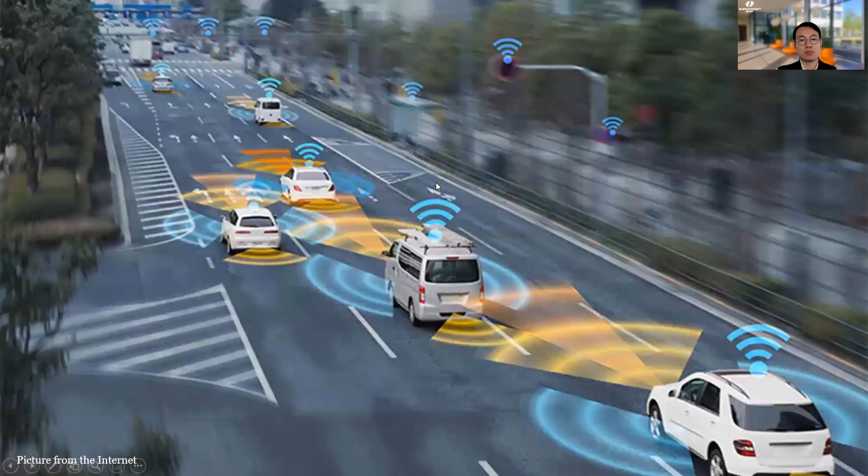So when you think of autonomous vehicles, what kind of pictures appear in your mind? Something like this maybe? Vehicles that travel harmoniously on the road with sensors to detect their distance among each other and Wi-Fi signals to receive requests from customers. But it may seem too good to be true, right? The fact is, ever since the first autonomous driving car was tested on road, there have been accidents involving this kind of system all the time.

So what happened? What makes them so difficult to realize, and what makes it so difficult to guarantee the safety of this kind of system?

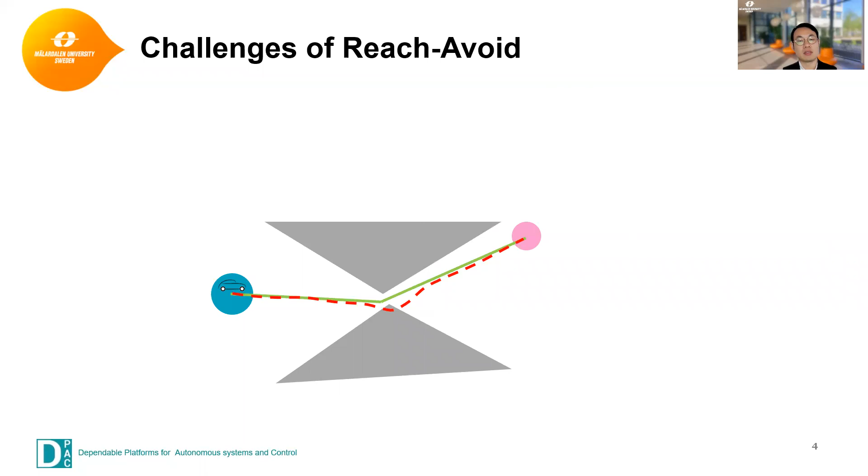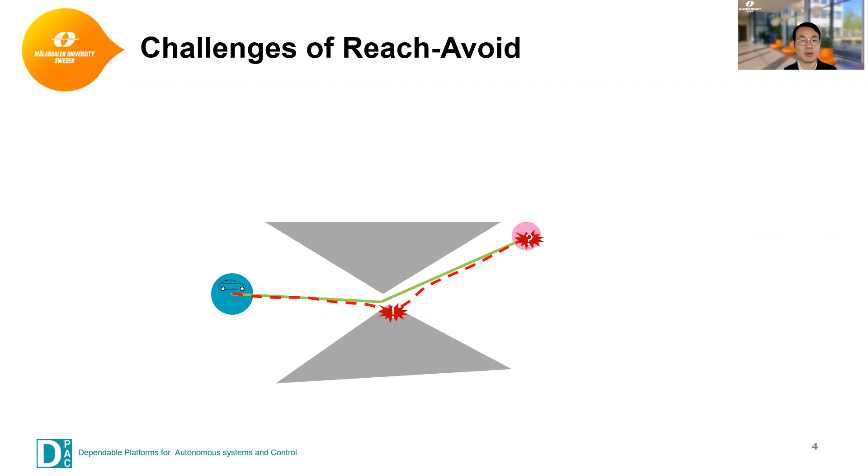But the fact is, the real trajectory has some inevitable deviation from the reference path, and this deviation can cause collision on the way, and it can make the reachability of the final destination a question mark. So the inevitable deviation from the real trajectory to the planned trajectory, which we call the reference trajectory, is called tracking error. This is the first challenge.

And even if the tracking errors do not cause a collision, there are some possibly moving or dynamic obstacles that travel towards the autonomous vehicle, and the overlap of their trajectories may also end up in a collision. So you see there are two kinds of hazards in this problem.

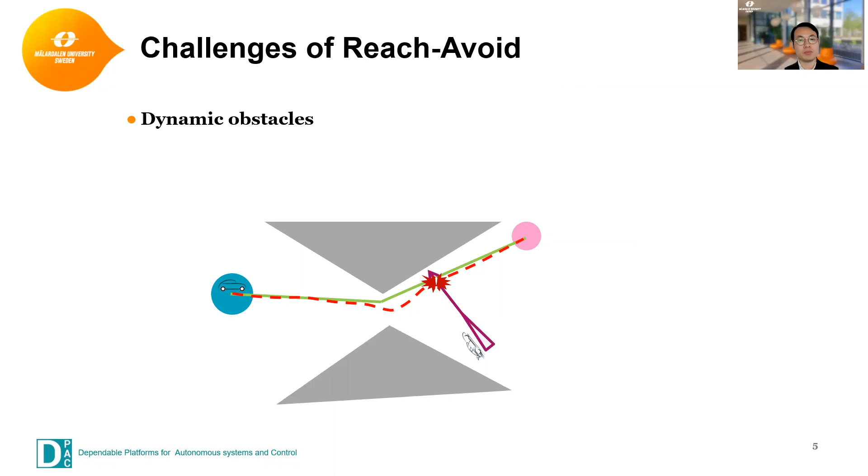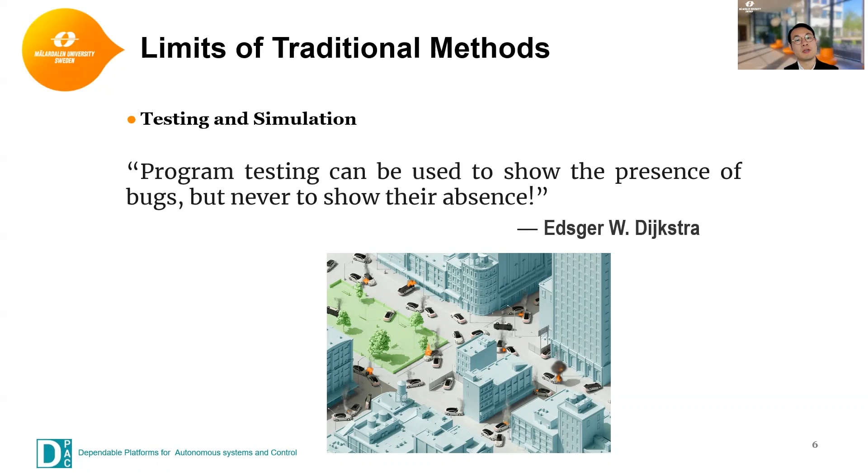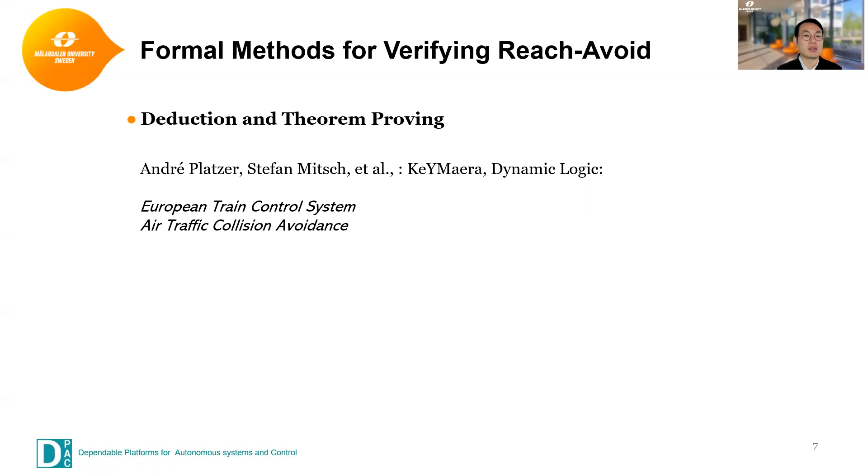But in this paper, we will be focusing on another branch of formal methods called model checking. Different from theorem proving, model checking traverses the states of the model to see if the states can satisfy some propositions or temporal logic properties. And one typical model of this technique is hybrid automata.

And to verify if the model can satisfy the reach-avoid requirement, we just need to have a look at the values of the positions, right? But unfortunately, model checking these hybrid models is undecidable. This is shown by many previous works.

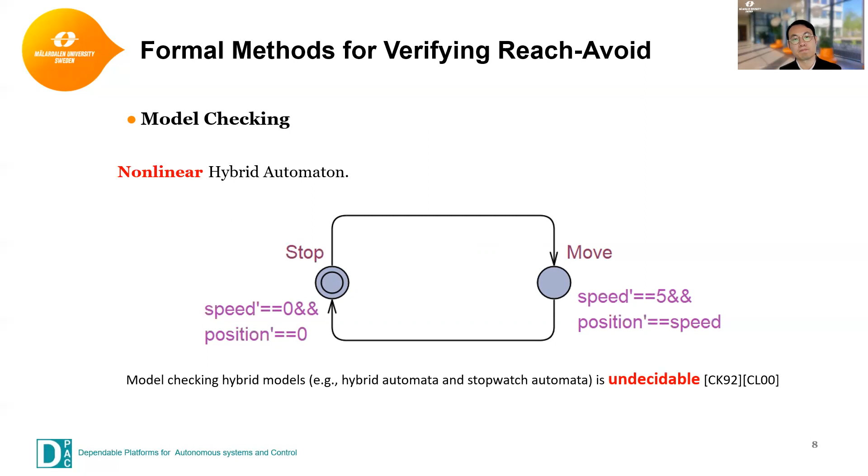So what do we do? We know that in the world of model checking, verifying hybrid models like hybrid automata is undecidable, right? But still, we have some problems that are decidable. So we want to kind of transfer the undecidable problem to a decidable one, so we can solve the problem.

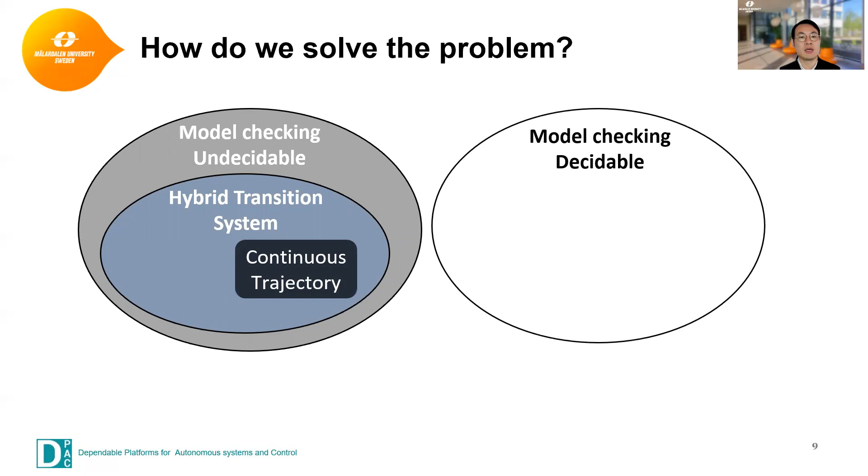Now, the good thing about using hybrid models is that, like I said before, we can get the continuous trajectory of the system, which is the real trajectory, right? So if somehow we can transfer the continuous trajectory to a discrete time trajectory, whose verification is decidable, then the problem can be solved. And of course, we also need to prove that the reach and avoid requirement of the continuous trajectory is preserved by the discrete time trajectory. So next, I'm going to show you how we make the transformation and how we do the proof.

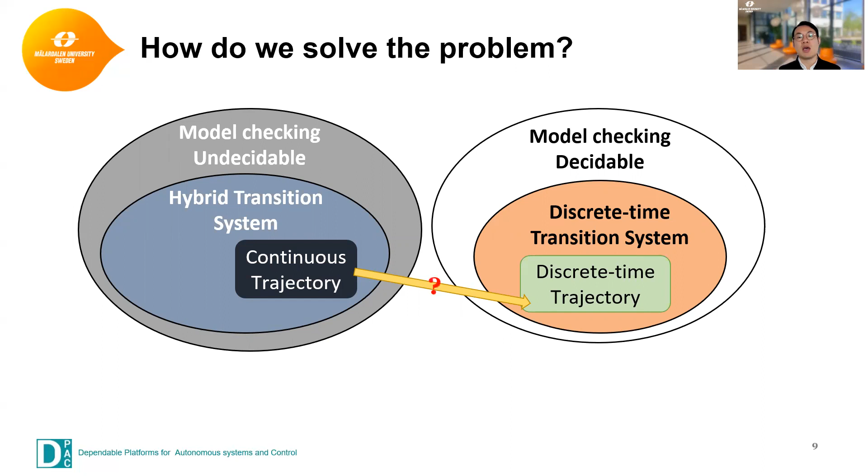First, let's deal with tracking errors. As I said before, tracking errors could possibly cause the collision. So if we don't know how much the deviation from the real trajectory to the reference trajectory is, it's impossible to know if the real trajectory is safe or not.

But thanks to previous work done by Chuchu Fan and her colleagues, we know that if the tracking errors of the vehicle have a Lyapunov function, they are bounded by a piecewise constant value centered around the reference path. Intuitively speaking, if you look at this picture, the boundaries of the tracking errors form a safe region, highlighted as the yellow area in this map. So the real trajectory can never go out of the safe region.

And of course, Lyapunov functions—there are plenty of papers describing this concept and how to synthesize Lyapunov functions for dynamical systems. We don't have time to introduce this, so please check these papers.

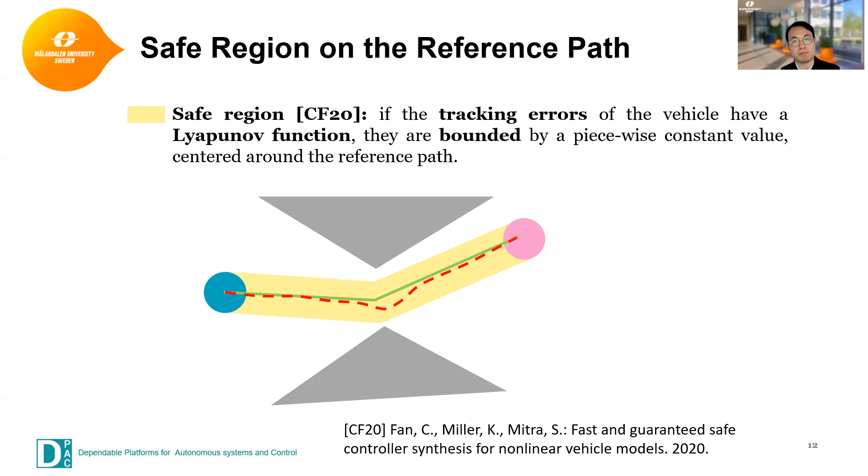So based on this conclusion, now we propose our first theorem, which transfers the verification of the real trajectory, which is continuous, to the reference trajectory, which is piecewise continuous.

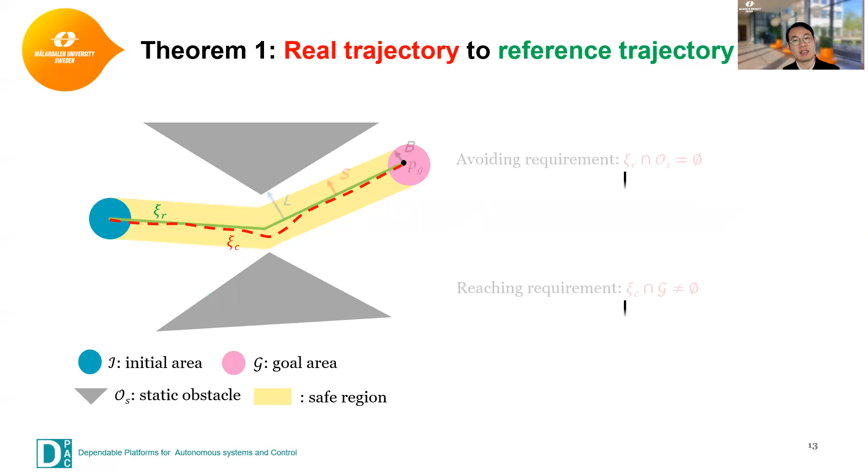If we translate theorem 1 into human language, what we want to do is this: if the distance from the reference trajectory, which is the green line, to the boundary of the safe region, which is S, is less than L—where L is the distance from the reference trajectory to the surface of the static obstacle—then we know that the real trajectory has no chance of overlapping with the static obstacles.

This is quite straightforward. And if there's a point in the goal region, called PG, if the distance from PG to the boundary of the goal area is B, and B is less than S, then we just need to prove or verify that the reference trajectory can reach PG. If we can prove that, we know the real trajectory is guaranteed to reach the goal area, which is also quite straightforward.

So with this theorem, in a map with only static obstacles, now we only need to look at the reference trajectory, not the real trajectory. Now the problem is much simpler.

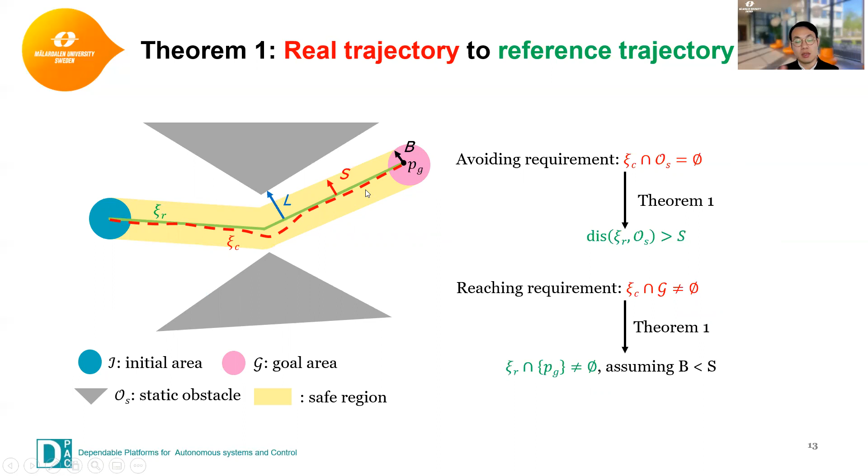But in an environment with dynamic obstacles, things become a little more complex, because even if the trajectory of the dynamic obstacle overlaps with the trajectory of our autonomous vehicle, the current position of the autonomous vehicle can be quite far away from the dynamic obstacle, which makes the collision unnecessary or unreal. But if they appear at the same time at the same location, of course collision can happen. So how do we distinguish these scenarios?

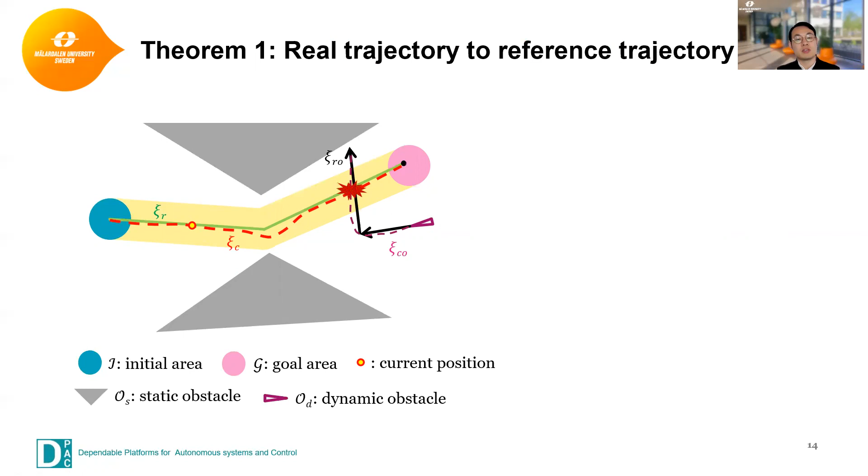We developed a new concept called the safety critical segment. It is an area before and after the current position of the autonomous vehicle. Only within this region is safety crucial, is critical. And if the dynamic obstacle enters into this safety critical segment, then collision can happen.

So now we only need to look at part of the reference path, not the entire reference path. And if this part of the reference path of the autonomous vehicle and the dynamic obstacle are far away from each other, in the sense that their distance is larger than their tracking error boundaries, then the real trajectories are guaranteed to not be overlapping, so they are safe.

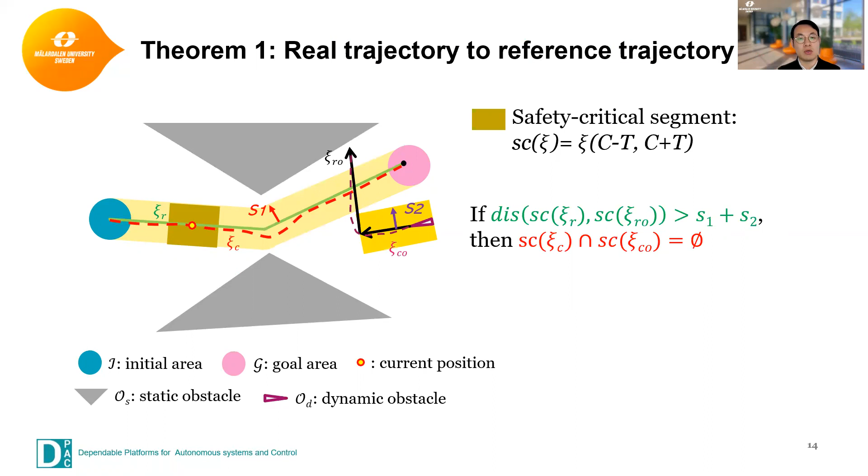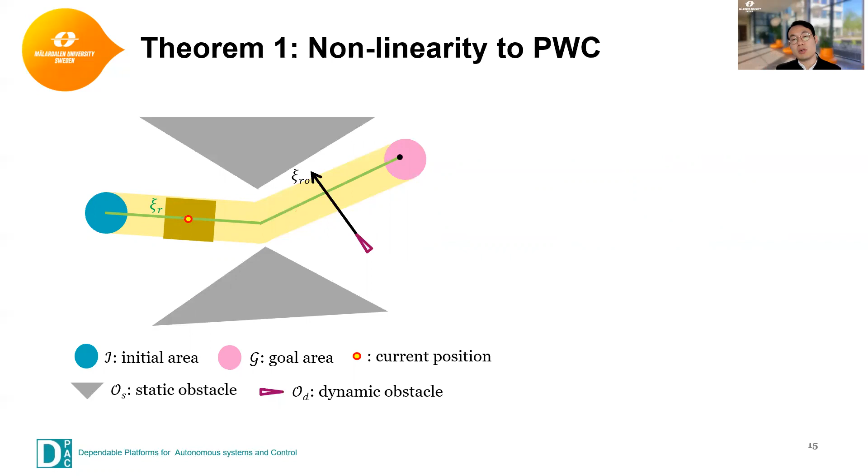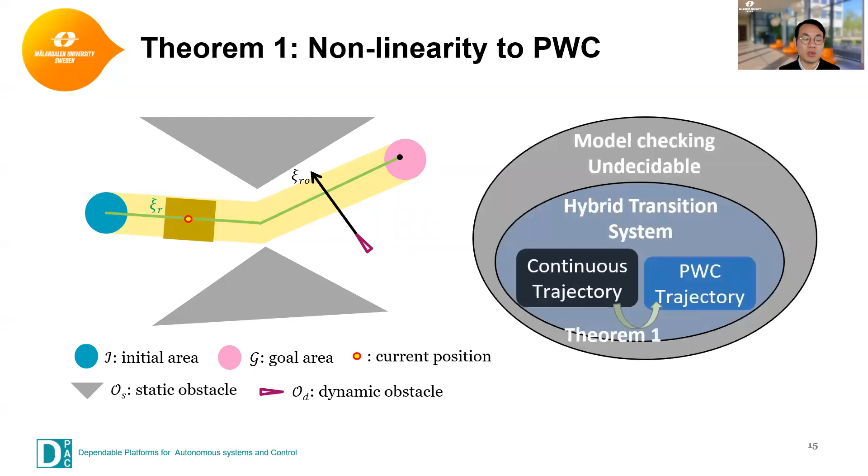In summary, the first theorem just transfers the nonlinear real trajectory to the piecewise continuous reference trajectory. Based on this result, we don't need to look at the real trajectories—we just need to check the reference trajectories, which is much simpler. But the verification of the piecewise continuous trajectory by model checking is still undecidable, so we need to do more work.

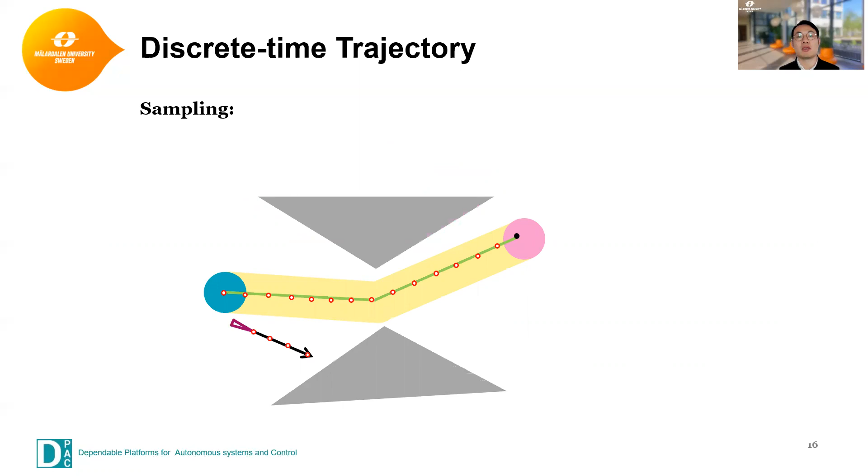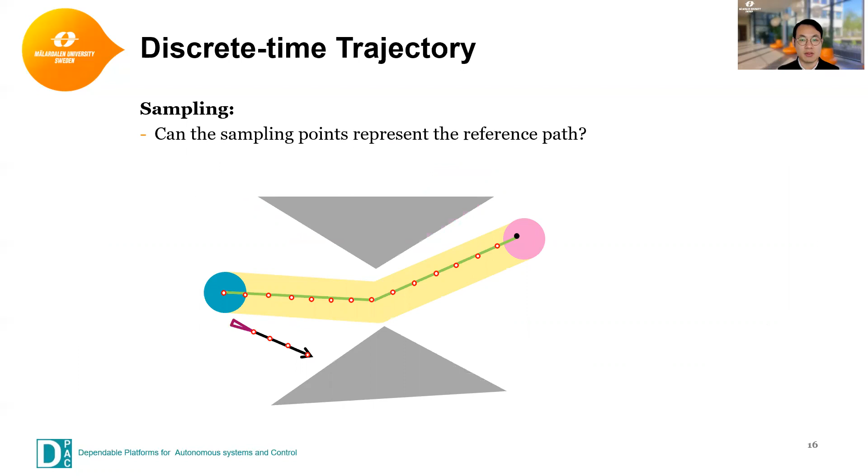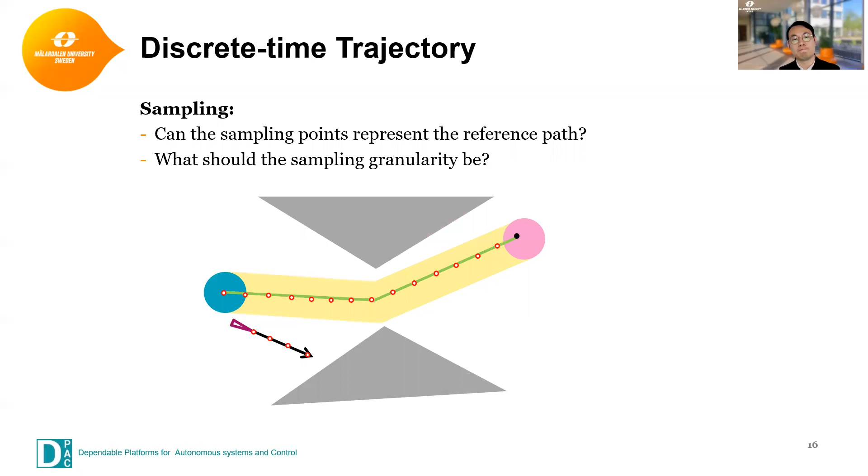What we want to do is transfer the piecewise continuous trajectory to a discrete time trajectory by sampling points on the reference path. Now the problem is: can the sampling points really represent the reference path in the problem of reach and avoid verification? And what should the sampling granularity be, so that it's not too big or too small? That's why we propose Theorem 2.

I just extracted 2 points from the theorem in this presentation because of the time limit.

The first point: the sampling granularity epsilon must be less or equal to S divided by the norm of V. S is the sum of the tracking error boundaries, and V is the maximum velocity of the dynamic obstacles. Intuitively, S represents the largest deviation of these two moving objects in the map from their reference trajectory, and V is the maximum velocity of the dynamic obstacle. So S divided by the norm of V means the minimum time for the dynamic obstacle to get into the safe region of our autonomous vehicle.

If the sampling granularity is larger than this minimum time, then we could possibly miss the point of collision. That's why the sampling granularity must be less or equal to this minimum time.

Very straightforward, right? So the second point of the theorem is the conclusion: if the sampling granularity satisfies condition 1, then the fact that the discrete time trajectory satisfies the reach and avoid requirement implies that the reference trajectory can also satisfy the reach and avoid requirement. The proof, of course, is in the paper, so please check it.

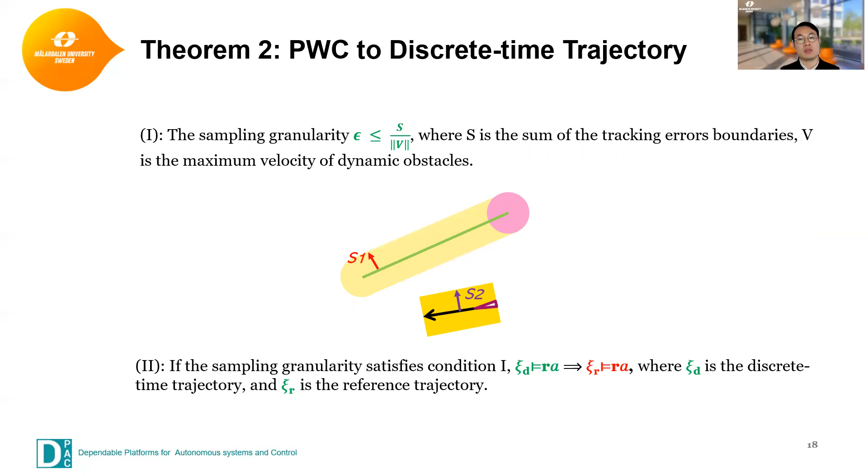Now we can get rid of the reference trajectory and only look at the discrete time trajectory, whose verification by model checking is decidable. In conclusion, by these two theorems, we transfer the undecidable verification or model checking of continuous trajectory to the decidable problem of verifying discrete time trajectory.

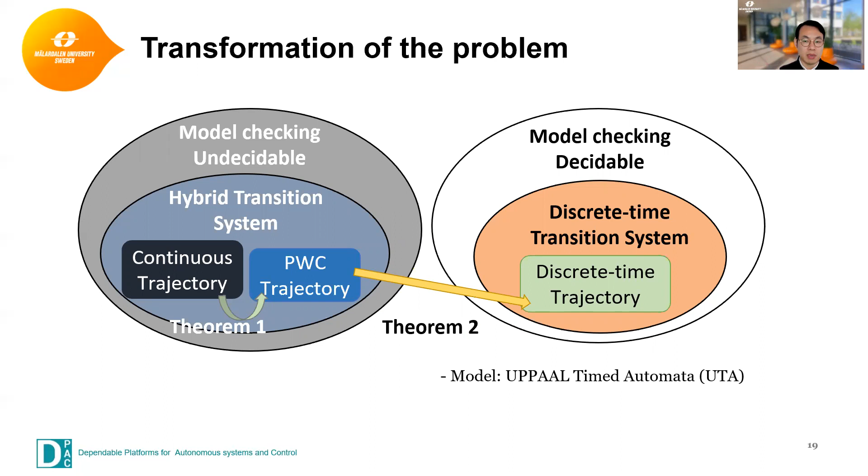Now we just need to look at how we model the discrete time trajectory using Uppaal UTA. These two pictures show the UTA templates of autonomous vehicles. Picture A models the vehicle controller UTA template, and picture B shows the vehicle parameters UTA template.

The instances of the templates of the parameter UTA are the state variables of the vehicles, like their positions, speeds, accelerations, and so on and so forth.

Basically, what we do in this model is that at the end of every PM time unit, where PM is the sampling period, the controller UTA invokes the parameter UTA so that the parameters are updated. Then the controller UTA continues to make a decision based on different scenarios.

When the vehicle needs to turn, it goes by this edge. When the vehicle needs to go straight forward, it goes by this edge. When the vehicle meets a dynamic obstacle and needs to avoid it, it goes by this edge and executes this function called avoid. I will go into this function later.

So you can see this model actually models the discrete movement of the vehicles. When we actually run this model, we can get the discrete time trajectory of the vehicles.

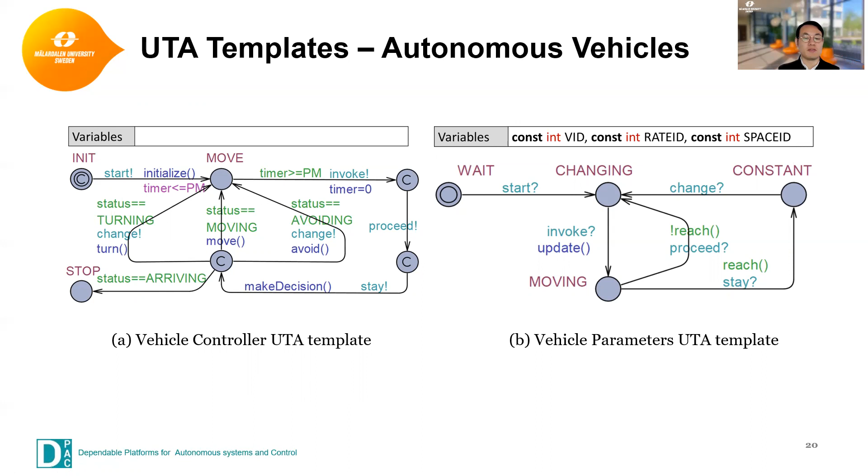These two UTA templates are for the dynamic obstacles. The first one is the initializer, which non-deterministically chooses the initial values of the state variables, like the positions, speeds, and headings of the dynamic obstacle. By using this template and initializing the dynamic obstacles, we know that the obstacle can actually appear at any position in the map and start with any speed and any angle.

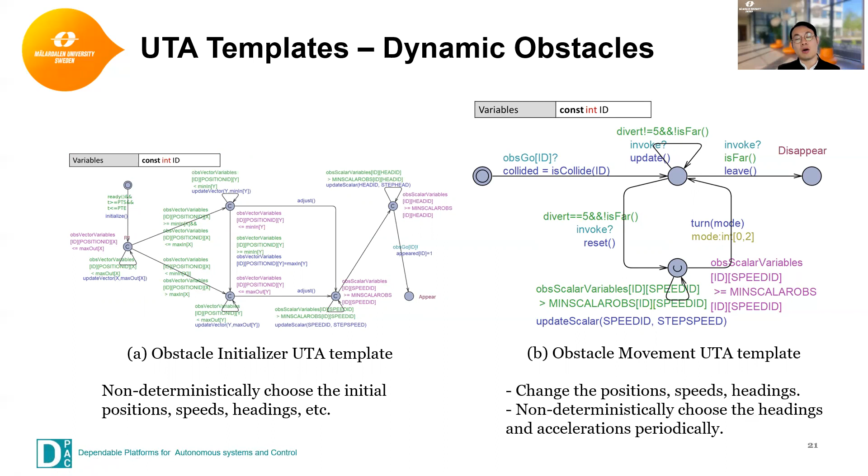Picture B models the movement of the obstacles. Basically, what it does is change the positions, speeds, and headings according to physical law. It also non-deterministically chooses the headings and accelerations of the dynamic obstacles periodically, so every certain time period, the obstacle has the chance to change its direction and acceleration.

So what we want to achieve by using this model is that if the autonomous vehicle model can satisfy the reach and avoid requirement in the existence of this kind of dynamic obstacle, which can appear at any place, at any time, and travel at any speed and any direction, then we know that the autonomous vehicle can be safe under any circumstances and can reach its destination.

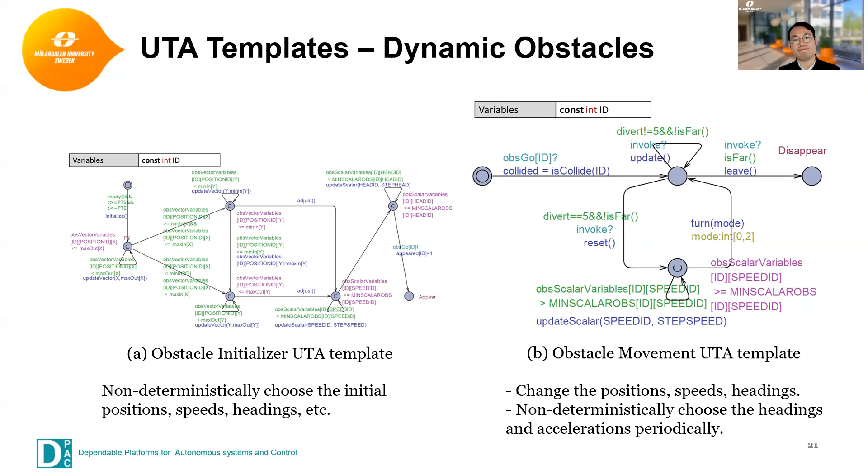By using this function, we do not need to write the code of the collision avoidance function in Uppaal, but by using standard C or C++, which is of course much more powerful. We just compile it into the regulated format like .dll in Windows or .so in Linux, and then we can link it to the tool, and Uppaal Stratego can call the external library during the verification.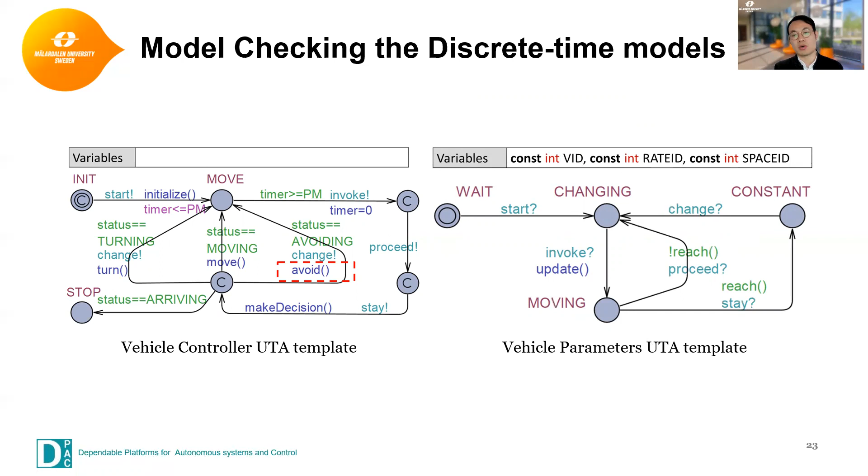By using the new information, the controller UTA updates the vehicle parameters so that, in the next sampling period, the autonomous vehicle can choose another direction or decelerate in order to stop and avoid the dynamic obstacle. So this is what we do here. If the verification returns true, we know that the vehicle can avoid any kinds of dynamic obstacles under any circumstances and reach their destinations. But if the verification is false, we also get the counterexamples which represent the problematic scenarios. By using these scenarios, we can improve the collision avoidance algorithm. So it's a closed loop.

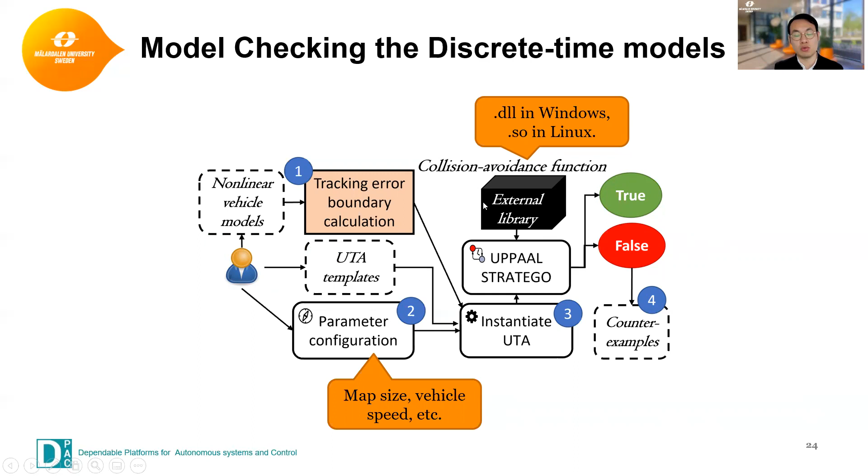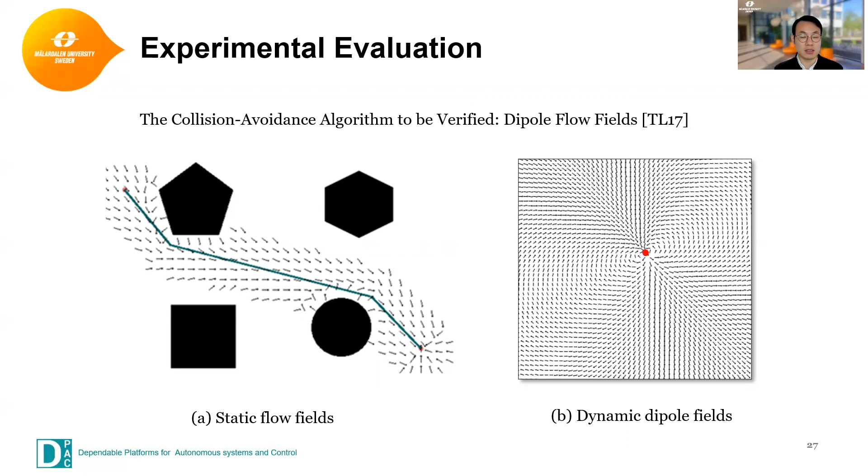But if two moving objects, like the dynamic obstacle and the autonomous vehicle, get close to each other, the algorithm generates dynamic dipole fields surrounding them, like two magnets with opposite dipoles. The closer they get to each other, the stronger the force will be to push them away from each other. So now the problem is whether the algorithm can work correctly in all kinds of scenarios.

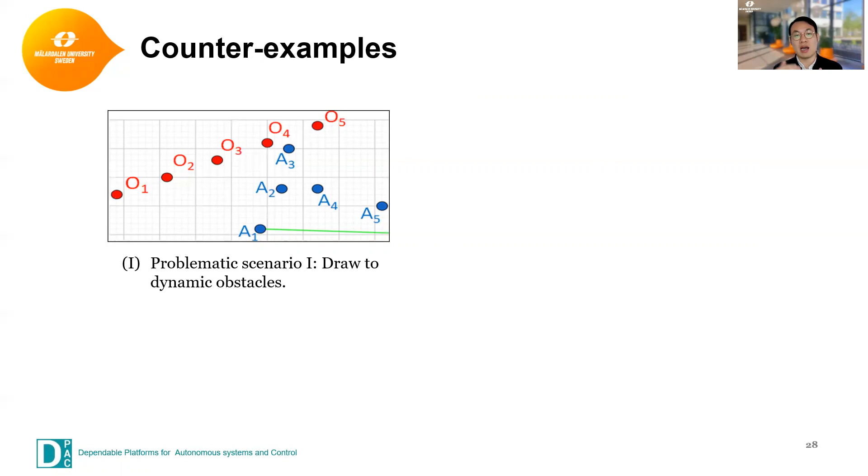So we verify the algorithm using our method, and we found two problematic scenarios. In the first scenario, the autonomous vehicle, which is the blue dot, is drawn to the dynamic obstacles, which are the red dots. Ideally it should be pushed away, but in this particular scenario, they are actually drawn to the dynamic obstacles. Weird. In the second scenario, we found the live-lock scenario.

We call it live-lock because when the autonomous vehicle and the dynamic obstacle travel opposite to each other on the same line, they just go back and forth forever. Because the attractive force on the reference path draws the vehicle forward, and the repulsive force generated by the dipole fields then pushes them away from the dynamic obstacles, and then the attractive force draws them forward again, so they just come back and forth forever.

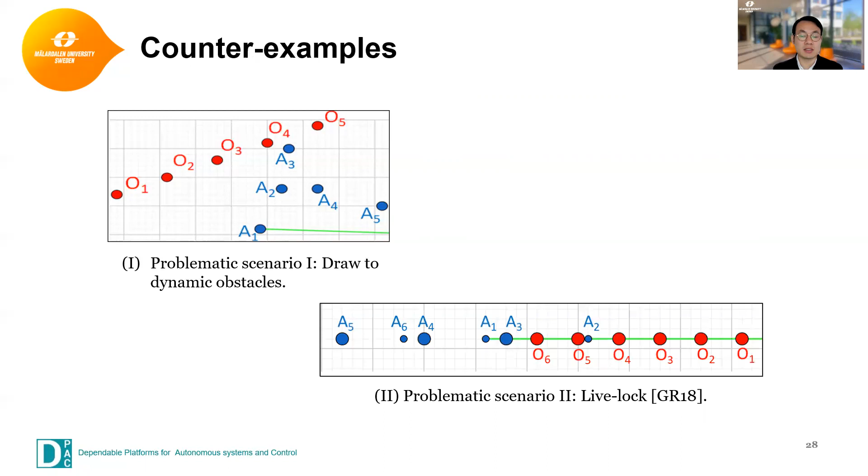Based on these two problematic scenarios, we improved the algorithm and verified again, and we got a new result. In the scenario with only one dynamic obstacle, the vehicle equipped with the algorithm can always satisfy the reach and avoid requirement. But when the dynamic obstacle becomes two, then the collision inevitably happens. Because we don't stop the autonomous vehicle when the collision happens, they can anyhow reach the destination, so the reach requirement is true.

But anyhow, we at least prove that the new algorithm can satisfy the reach and avoid requirement when the environment has only one dynamic obstacle. We leave the improvement of the algorithm for future work.

So in conclusion, in this paper, we propose Theorem 1 and Theorem 2 to prove that the reach and avoid verification of the nonlinear vehicle models, which is undecidable, can be transformed to the verification of discrete-time models, which is decidable. The transformation does not lose the completeness of verification, and this is valuable. In the experiments, we show that our generic approach is able to detect or demonstrate the absence of problematic scenarios.